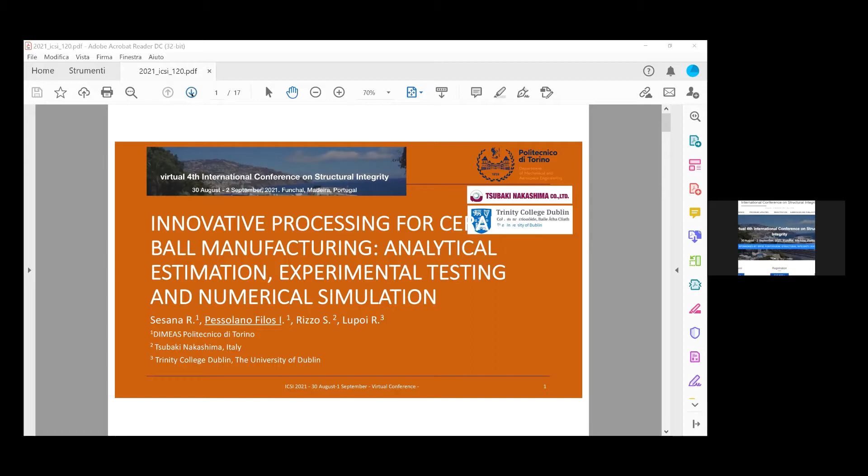Okay, before going into the detail of our study, let's introduce our framework. We deal with ceramic balls for hybrid bearings. In this frame, the ceramic balls are used thanks to their physical, thermal, and electrical properties to guarantee a high-performance product and safety in their application.

In fact, compared to standard bearings with steel balls, they have a higher wear resistance thanks to the higher Young modulus, a larger temperature range due to the lower coefficient of thermal expansion. Ceramics guarantee self-lubrication properties and do not allow current flow through bearings, obtaining an electric insulation effect.

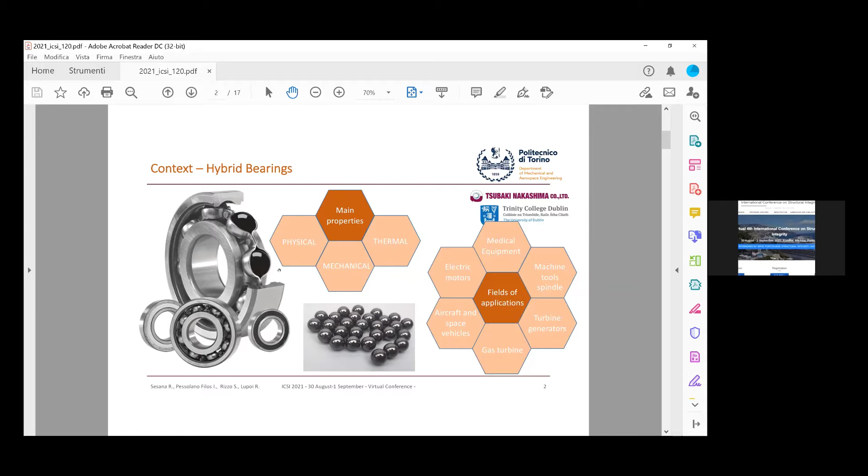Those are only some properties of ceramic balls that explain why ceramic balls are used in hybrid bearings and why hybrid bearings are implemented in several fields. The major goal of this research is the development of ceramic ball production. In fact, in general, the technological progress in hybrid bearings develops high wear and abrasion-resistant materials for rolling elements.

The manufacturing process of bearing balls presents new challenges, and it requires a time-consuming and costly process. In this frame, the bearing manufacturing industry is demanding improvement in grinding wheel geometry, in the input process parameters, and in materials. This work aims to investigate new abrasive coatings for grinding wheels for ceramic ball production, for silicon nitride

ball production. Therefore, we compare a traditional electrodeposited diamond versus a diamond-reinforced metal matrix coating, in order to investigate the wear resistance and the final surface characteristics of silicon nitride balls.

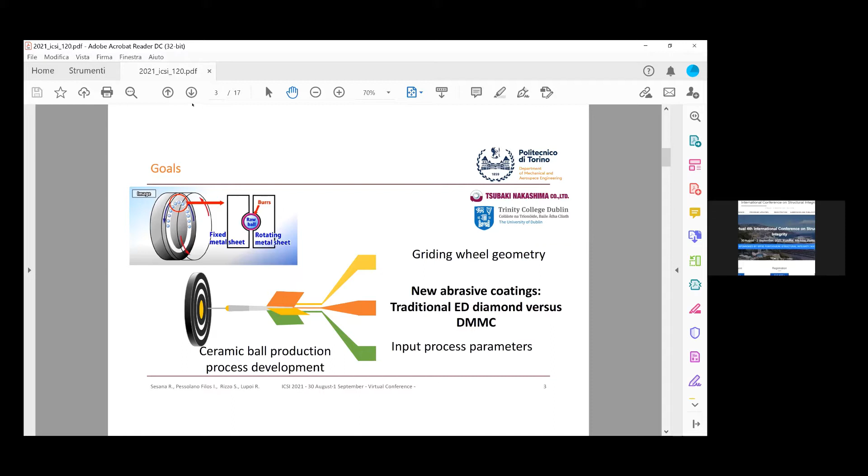As a first step, we perform an experimental characterization before performing the wear test. Then the experimental setup for the wear measurement parameters. After the experimental approach, we perform a finite element analysis and the wear simulation procedure. The last step is used to simulate the manufacturing process.

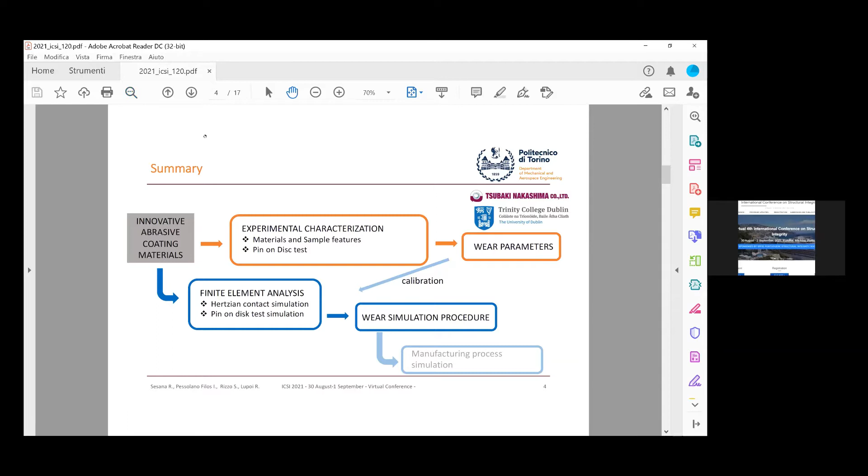The experimental investigation involved the use of silicon nitride ceramic balls with a nominal diameter of 6 mm and 2 different diamond coatings employed in pin-on-disc tests: a diamond-reinforced metal matrix, indicated as DMMC, and a synthetic diamond coating with a maximum particle size of 30 micrometers, indicated as D30. Sample preparation was carried out in collaboration with Politecnico, Tsubaki Nakashima Internal Application Laboratory, and the Research Center at Trinity College.

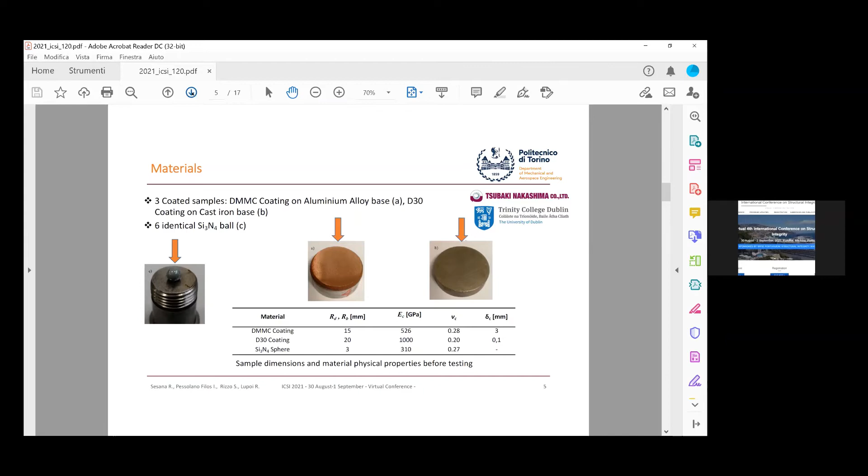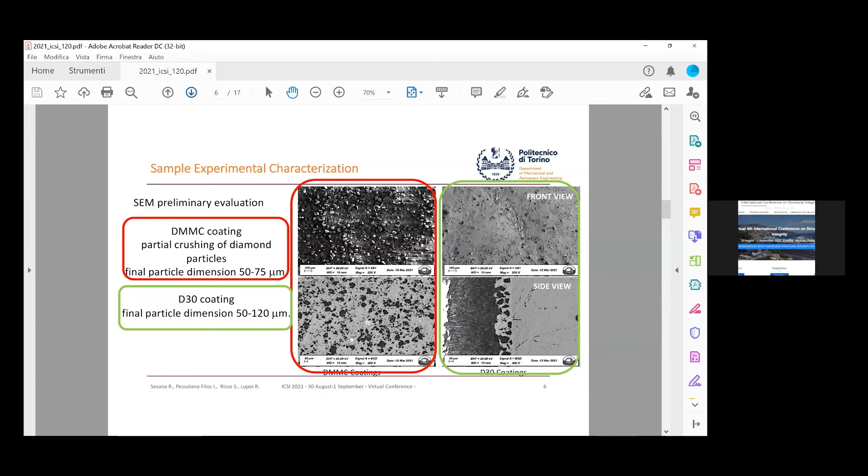As a result of preliminary work, it was concluded that for each combination of bearing ball, that is the pin, and coated substrate, the plate, two wear measurements were performed by imposing the pin-plate contact at 7 and 11 millimeters from the disc center, and by adopting different values of relative rotating speed between 20 and 40 RPM. Normal load and sliding distance were fixed at 1 Newton and 150 meters respectively.

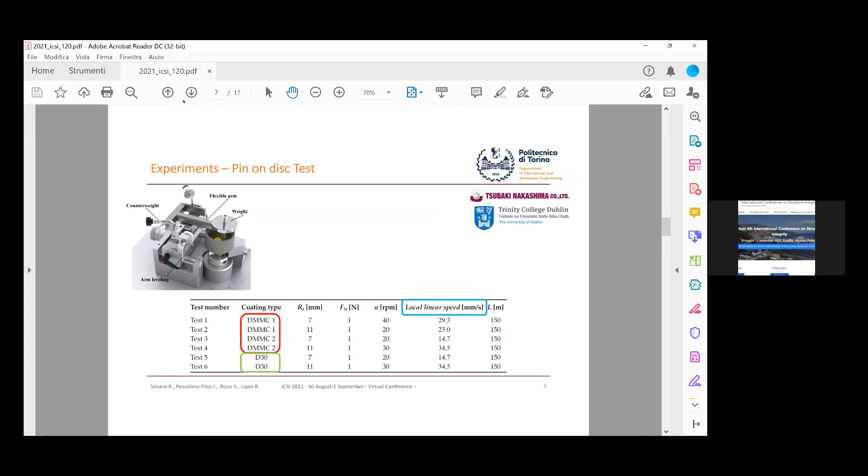Testing conditions adopted for the performed tests are synthesized in the table, and as you can see, what differs in each test is the local linear speed. For each pin-on-disc test, wear of the contact bodies was calculated by appropriate linear dimension, length or shape change of the pin, and depth or shape change of the disc track.

Subsequently, wear linear measurements were converted into wear volume through appropriate geometric relations reported in the two standards G99 and ISO 18535. A further parameter quantifying wear is introduced by the Archard equation. This approach is adopted to model the friction phenomenon for the purpose of determining the wear coefficient K, dimensionless, and the wear rate U expressed as micrometers per hour.

Once the volume of the wear product, the sliding length, the normal force between the surfaces and hardness are known, the wear coefficient can be calculated thanks to the Archard equation. And the wear equation can also be expressed as the wear rate.

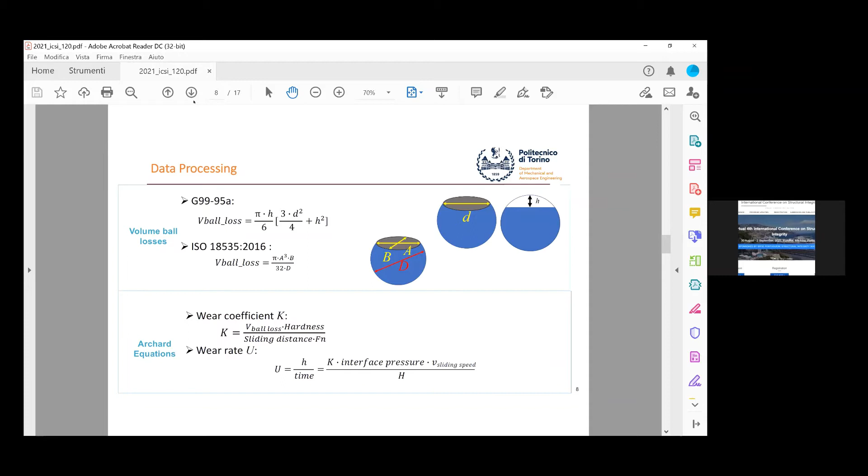As expected, values of sphere volume losses calculated with both standards were very similar. However, values of the disc volume loss calculated with the standard were found to be negative, thereby indicating a disc volume increment rather than a decrement.

Such an output can be explained by referring to the significant roughness of the disc and the deposition of the debris in the surface irregularities, with the resulting conclusion that the formula proposed for the calculation of volume loss may not be reliable for the disc in this kind of experiment, where the abraded part is the ball, the pin. These results are confirmed by profile measurement and by visual and optical microscope observation of the wear track on the disc.

When considering the entire set of experimental data obtained from tests carried out with the DMMC, it can be observed that the volume loss was found to increase as values of local linear speed increase. In particular, this can be assessed by progressively considering the results of test 1 and test 2, carried out using the same DMMC specimen with a linear speed of 29 and 23 millimeters per second respectively, and test 3, run with a second coated disc, DMMC specimen 2, with a linear speed of 40 millimeters per second.

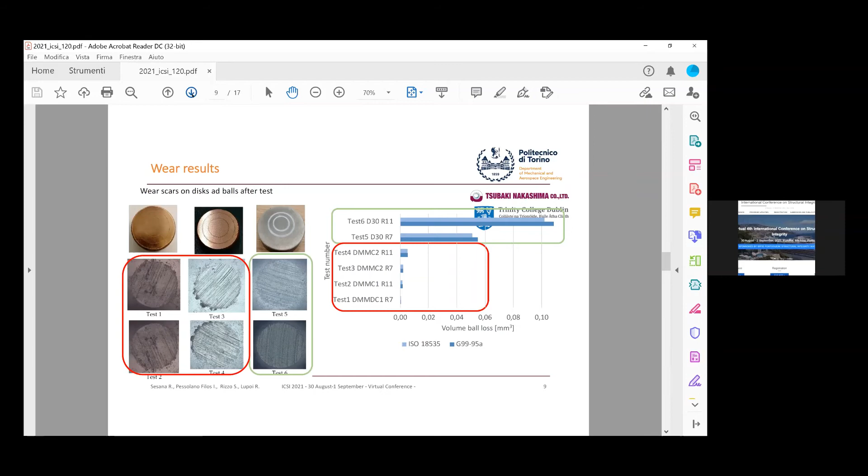For the analysis of the delta volume, the two different volume loss estimations proposed in the two standards gave results with a difference lower than 8%. As reported, this difference does not affect the discussion of results, and both formulations can be applied to comparing the wear performance of the investigated coatings.

Then, through the values of volume lost by the balls, according to ASTM G99, the wear coefficient K and the wear rate of the 6 tests were calculated using the Archard equation. Figures in the slide show the wear coefficient and the wear rates of the silicon nitride balls used during the test. It is evident that the D30 coating, which has a higher surface roughness value than the DMMC, performs a strong adhesive action on the balls.

In the figure, it can be observed that the wear coefficient K increases with increasing sliding linear speed. In fact, according to the model, all the parameters are constant for different testing conditions, and the variable is the abraded volume, which increases with increasing local linear speed.

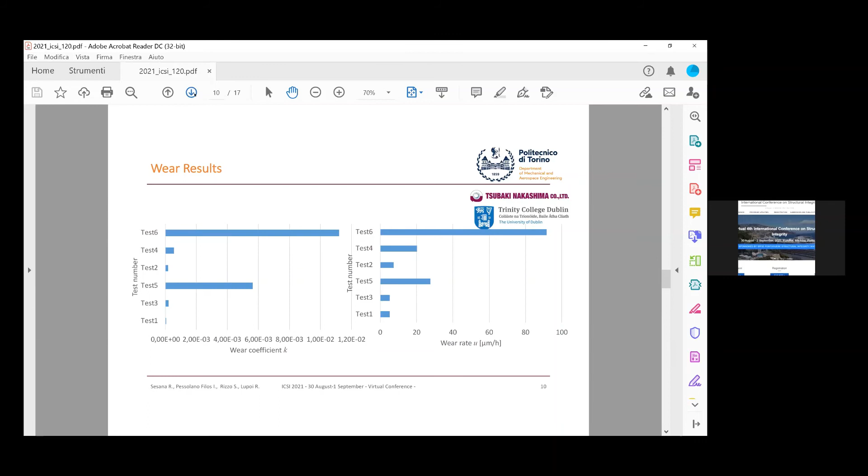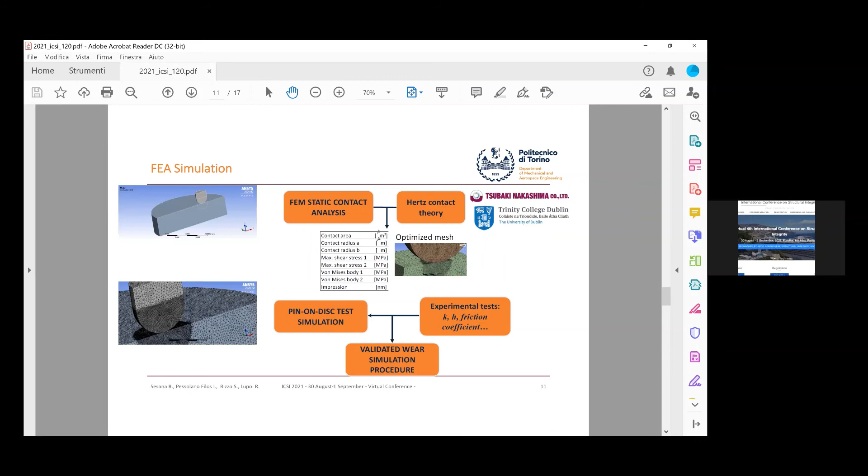After the experiment, we performed a finite element analysis in ANSYS software. First, a static contact simulation was performed to find the reaction force needed for the second simulation, the pin on disc one. Concerning the wear modeling procedure, the continuous process was discretized into several steps. Therefore, the contact pressure between the contact surfaces was calculated. Then the wear increment and the contact nodes of every element were updated. At the end, the total wear depth calculation on the contact surface was possible. The model assumed that during each step, the contact parameters are constant, such as pressure or surface morphology.

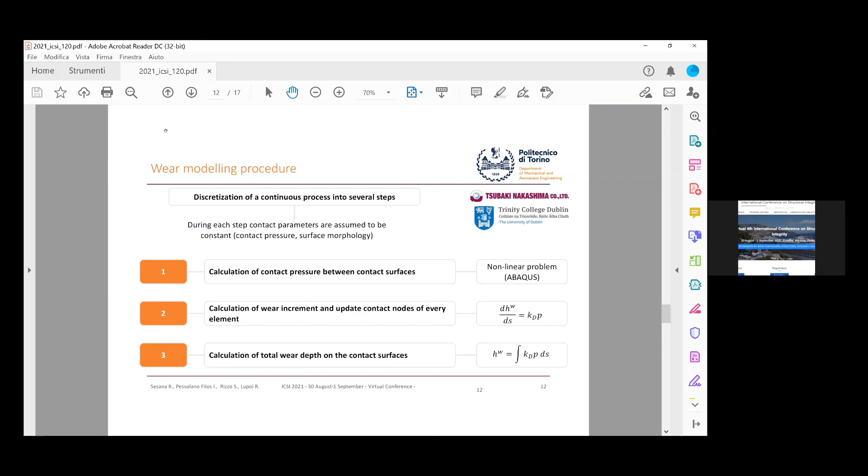Then a simplified linear model was developed, and we focused on the time step and the mesh evaluation. In fact, a good time step value is given by the trade-off between precision and calculation time. Moreover, a too coarse mesh can lead to a worsening of the results.

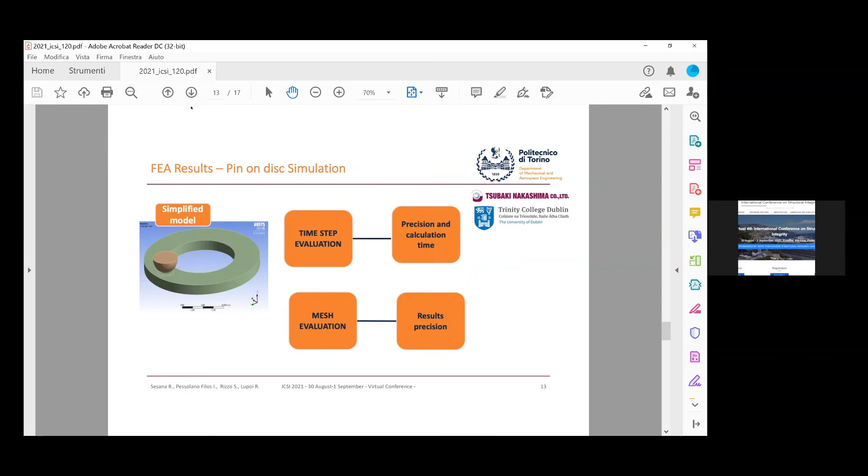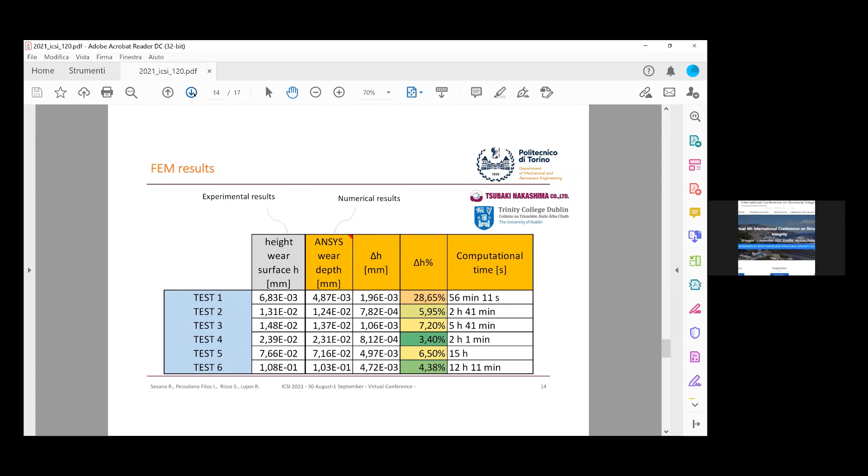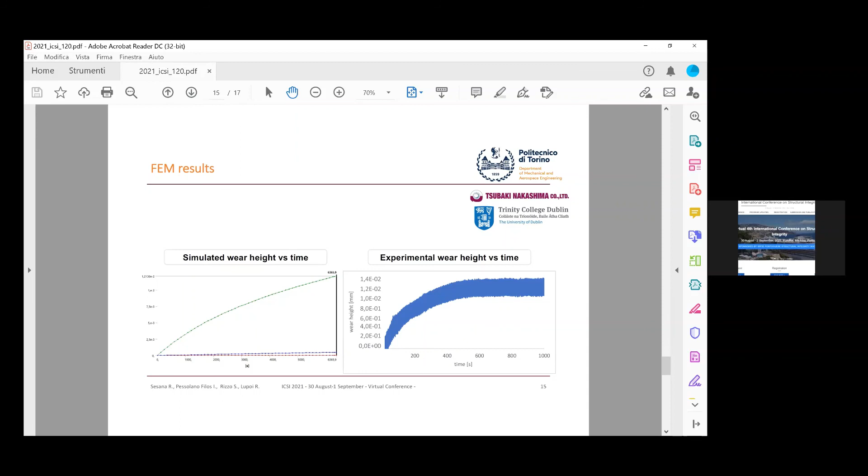In conclusion, we can say that the experimental procedure for the wear behavior of diamond abrasive coatings matches the analytical models in the wear estimation standards. Pin on disc tests allowed us to point out the wear parameters between non-homogeneous materials. Then the mesh optimization of the wear pin on disc simulation was pointed out thanks to the nonlinear static simulation of the contact. Last, the wear simulation procedure will be applied to simulating the entire grinding wheel processing procedure.